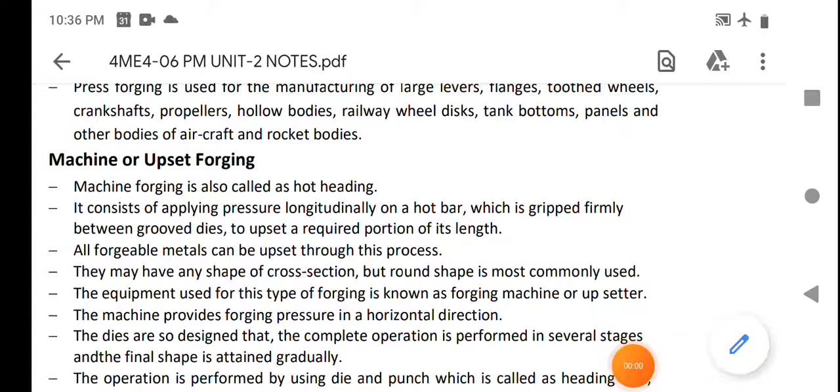Welcome student. Now we start with the topic of machine or upset forging.

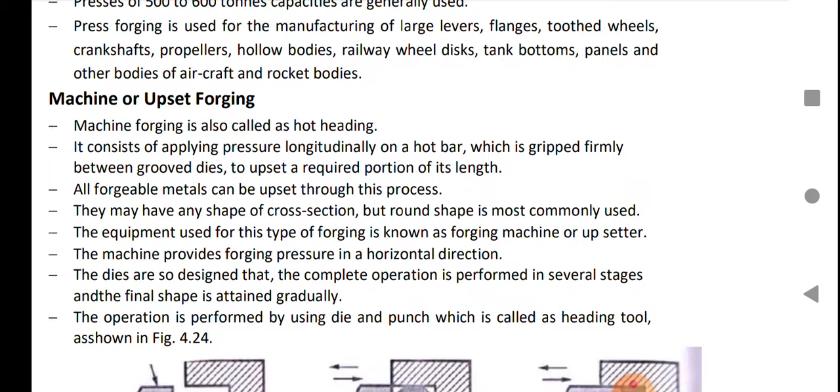Machine forging is also called hot heading operation. It consists of applying pressure longitudinally on a hot bar which is gripped firmly between grooved dies to upset the required portion of its length. Any forgeable metal can be upset through this process. They may have various shapes of cross section, but round shape is most commonly used.

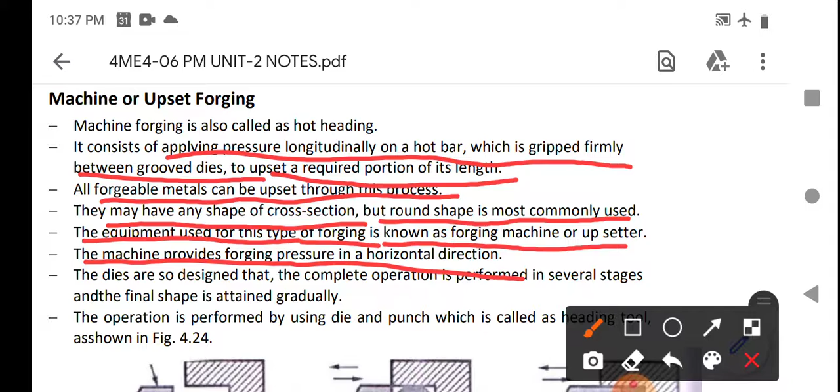The equipment used for this type of forging is known as a forging machine or upsetter. The machine provides forging pressure in the horizontal direction. The dies are so designed that the complete operation is performed in several stages, and the final shape is attained gradually.

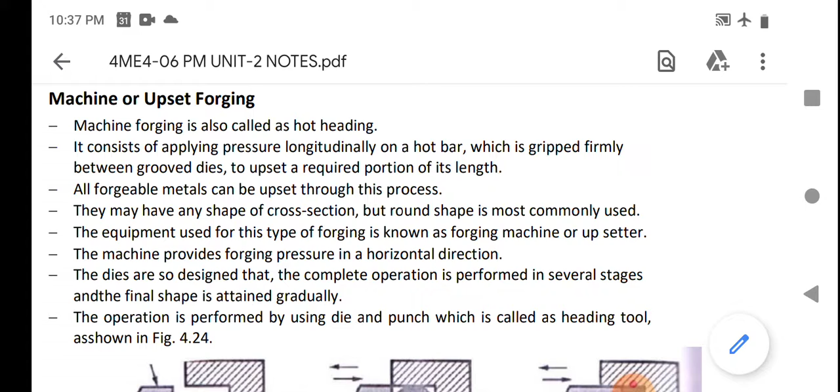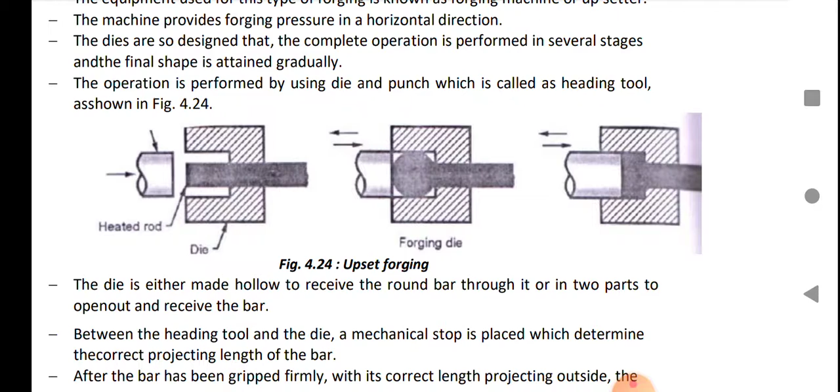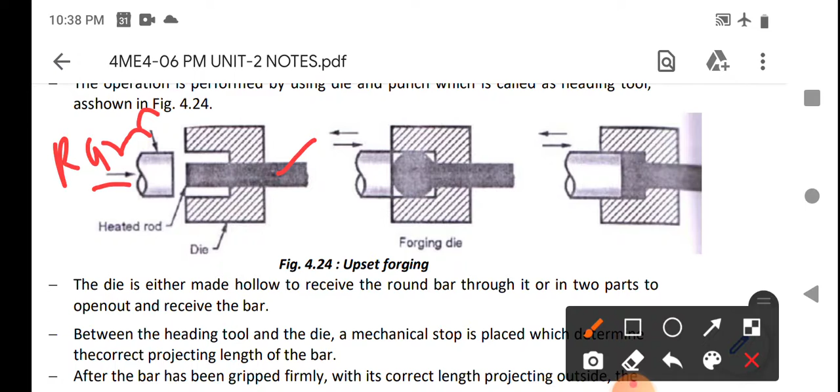The operation is performed using a die and punch, which is called a heading tool. As shown in this figure, when force is applied with the help of a ram on our workpiece, which is shown in black color - this is the workpiece, this is the ram, and this is the container or die. When force is applied, the first deformation is like a spherical shape, then it converts into an increased diameter of the rod. So the main operation of upset forging is to increase the diameter of the rod.

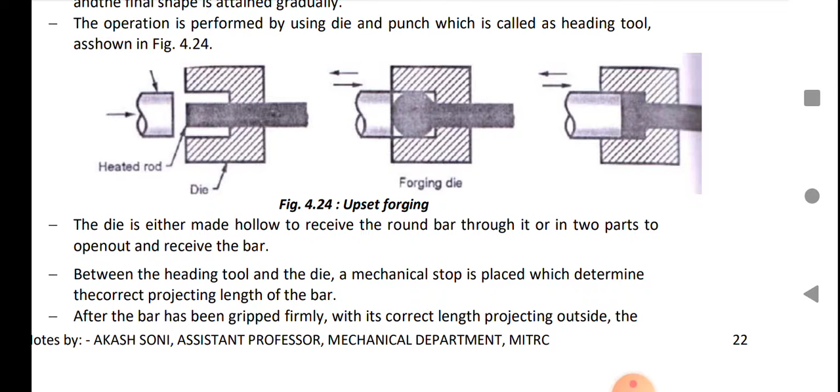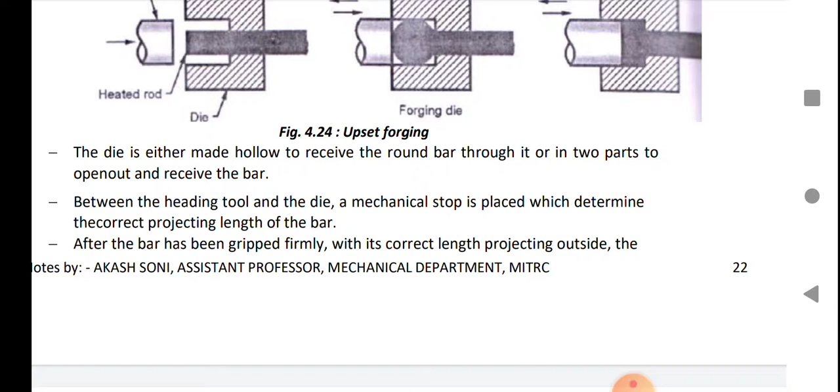Between the heading tool and the die, a mechanical stop is placed which determines the correct projection length of the bar. After the bar has been gripped firmly with its correct length projected outside, many such strokes are required to complete the upsetting. This forging produces rings and rod types with heads and shoulders, such as bolts and nuts.

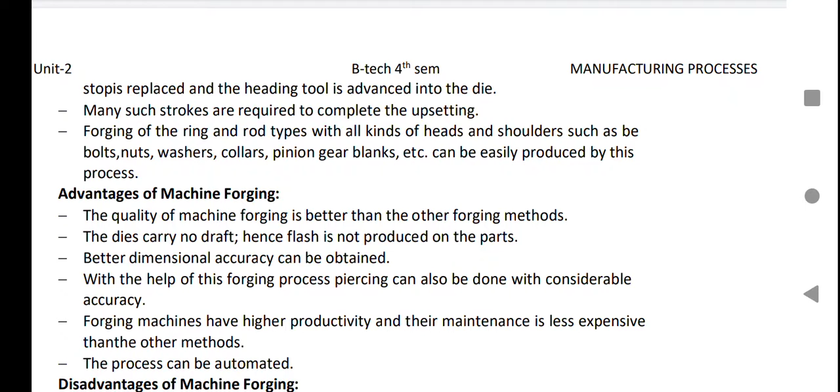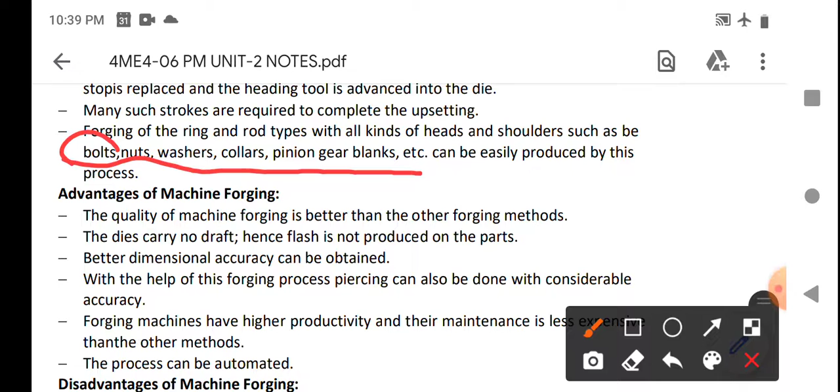This is the most important question which has come in exams: which operation is performed to produce bolt, nut, washer and collar? So upset forging process is used to make bolt and nut type structures. Advantages of machine forging:

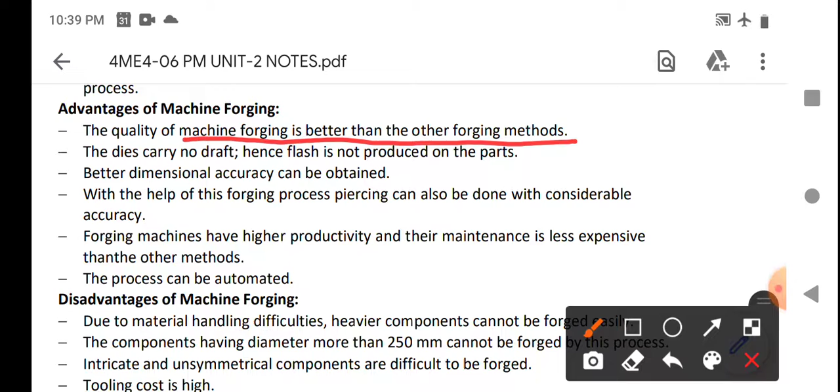The quality of machine forging is better than other forging methods, because the machine applies more force compared to manual forging processes like hammering. In machine forging, we apply more force compared to other processes.

The dies carry no draft, hence flash is not produced on the part in this operation, because it has no draft. Better dimensional accuracy can be obtained with the help of this forging process.

Piercing can also be done with considerable accuracy. Forging machines have higher productivity, and their maintenance is less expensive than other methods. The process can be automated.

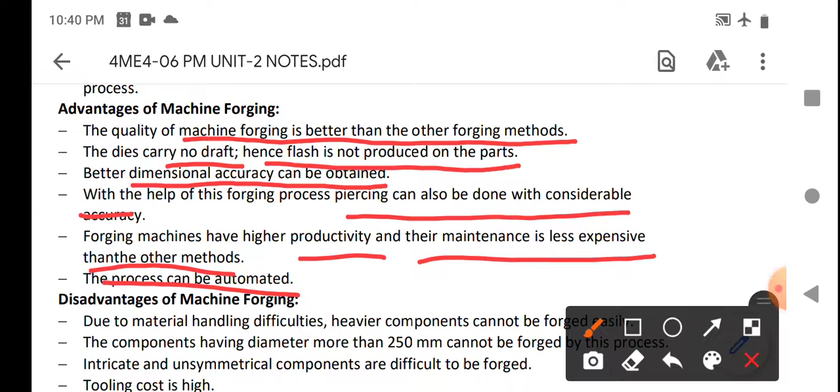Because we use machines, different types of automated machines are now available in the market. When we fix our workpiece on the machine, it automatically performs the operation without any human effort.

Now we discuss disadvantages of machine forging. Due to material handling difficulty, heavier components cannot be forged easily. Components with diameter more than 250 mm cannot be forged by this process.

Intricate or unsymmetrical components are difficult to forge. Tool cost is also high.

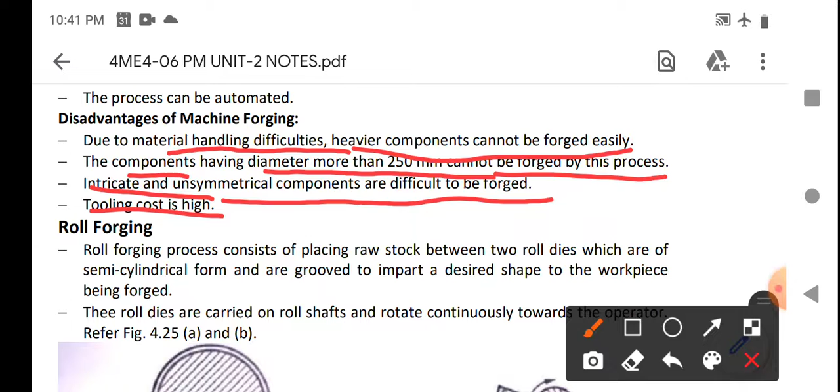Now we discuss roll forging. In roll forging, the process consists of placing raw stock between two roll dies, which are of semi-cylindrical form, grooved to impart a desired shape to the workpiece being forged.

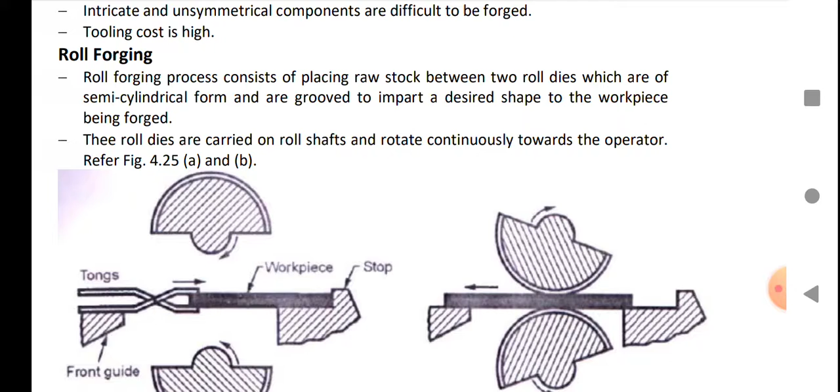As you see in this figure, if we want to increase or decrease the cross section area of the billet or rod, then we use rolling operations.

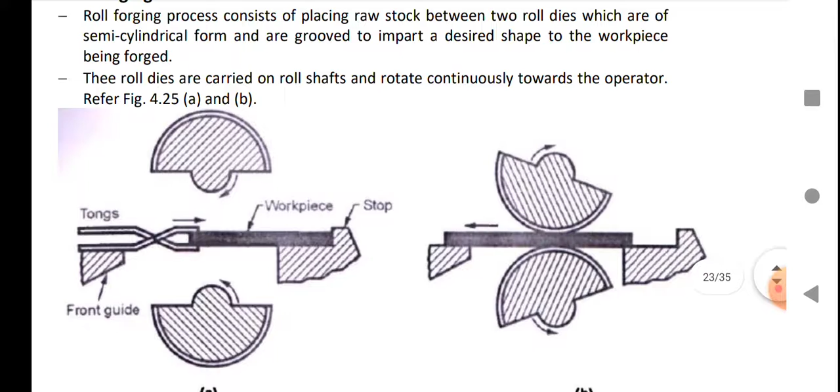As shown in the first figure, the roll is in open condition with the heated workpiece in the tongs, resting on the guide. The rolls are brought together with the stock gripped in the grooves of the roll. The rolling action forces the stock toward the operator.

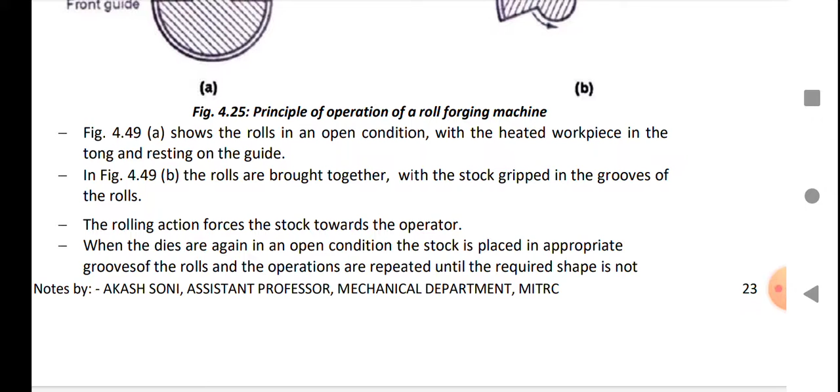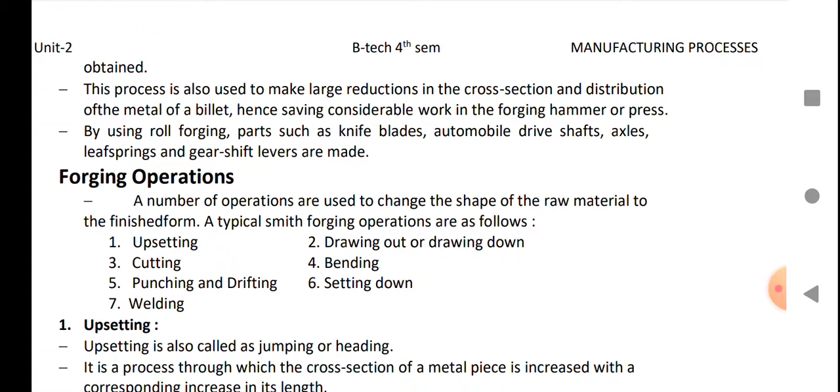When the dies are again in the open condition, the stock is placed in the appropriate groove of the roll and the operations are repeated until the required shape is obtained. This process is also used to make large reductions in the cross section and redistribution of the metal of a billet, saving considerable work in the forging hammer or presses.

By using roll forging, parts such as knife blades, automobile drive shafts, axles, leaf springs and gear shift levers are made. Now we discuss different types of forging operations.

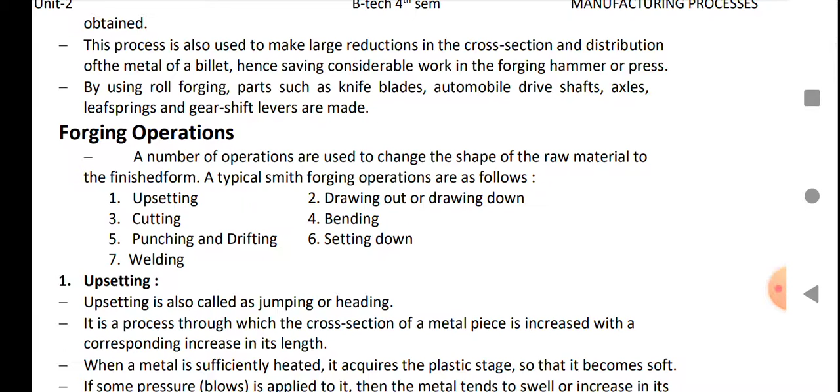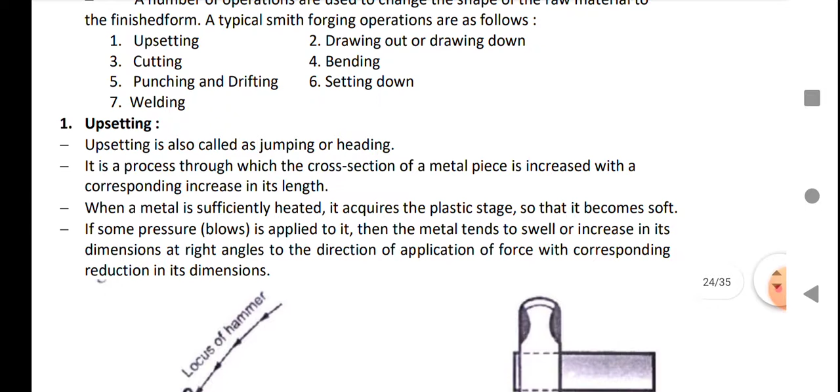As we discuss the upsetting process, in this process we increase the diameter of a rod with the help of the upsetting process.

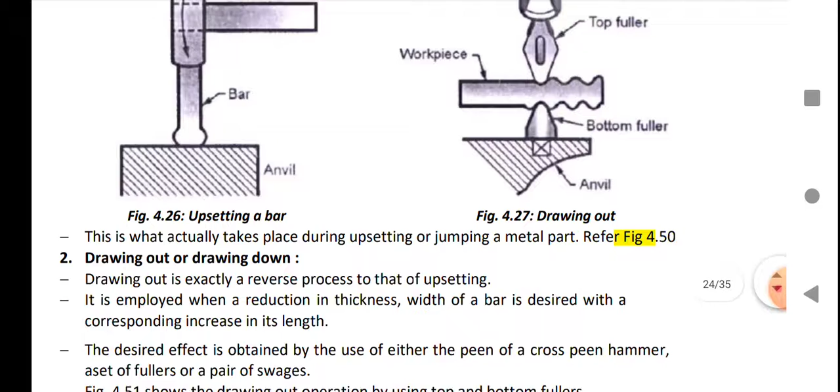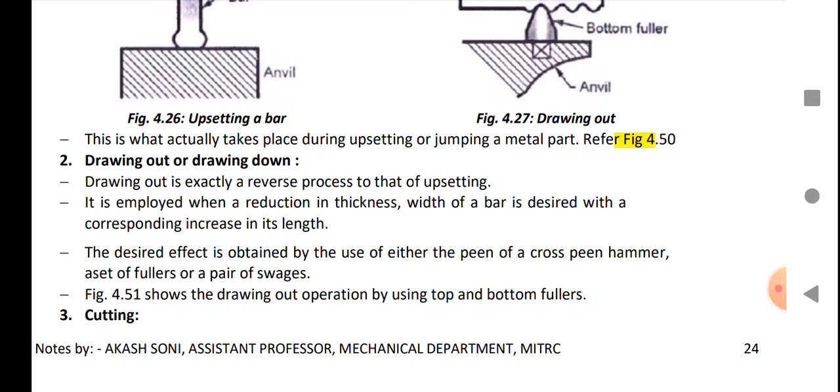Now we discuss the drawing out or drawing down process. Drawing out is exactly a reverse process to that of upsetting. In upsetting, we increase the diameter of a rod, but in drawing out or drawing down operation, we reduce the diameter or cross sectional area of the object, and also increase its length. The desired effect is obtained by the use of either the peen of a cross peen hammer, as seen in this figure.

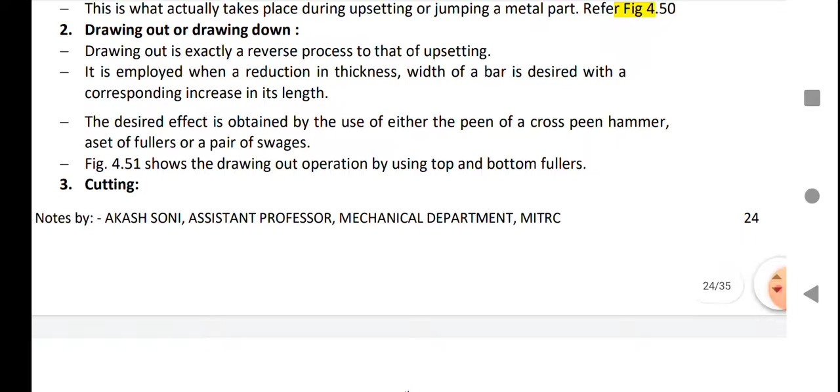Now we talk about the cutting operation. In cutting operation, cutting or chiseling is done whereby a long piece of stock is cut into several specified lengths, or a forging is cut off from the stock.

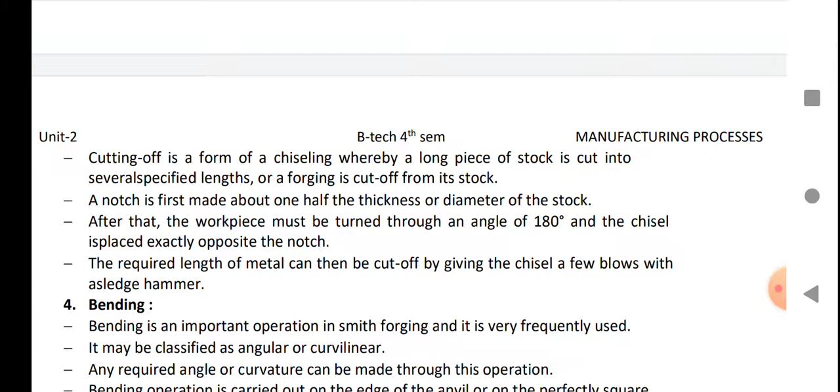A notch is first made about one half of the thickness or diameter of the stock. After that, the workpiece must be turned through an angle of 180 degrees and the chisel is placed exactly opposite to the notch.

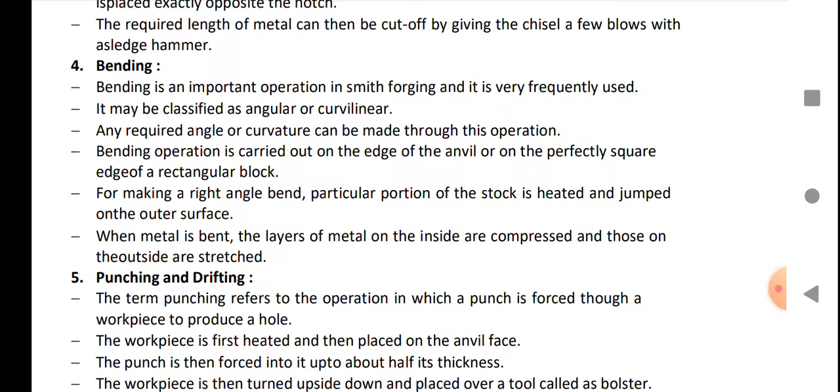Now we discuss bending. Bending operation is to bend the rod or sheet with the help of the edge of an anvil or other perfectly square edge of a rectangular block.

In punching and drifting, punching refers to the operation in which a punch is forced through a workpiece to produce a hole. The workpiece is first heated and then placed on an anvil face. The punch is then forced into it up to about half its thickness.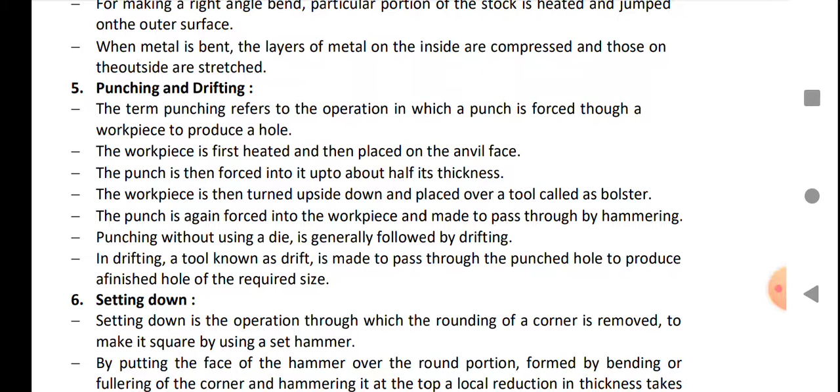The workpiece is then turned upside down and placed over a tool called a bolster. The punch is again forced into the workpiece and made to pass through by hammering. Punching without using a die is generally followed by drifting, in which a tool known as a drift is made to pass through the punched hole to produce a finished hole of the required size.

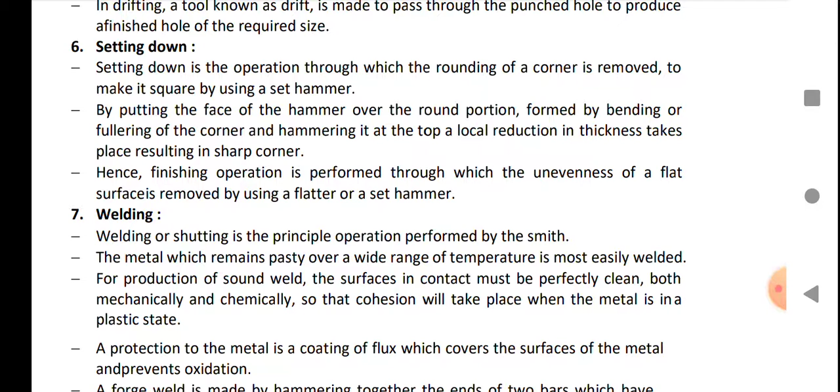Setting down operation. Setting down is the operation through which the rounding of a corner is removed to make it square, using a set hammer, by putting the face of the hammer over the round portion formed by bending or fullering of the corner. Like this type of metal.

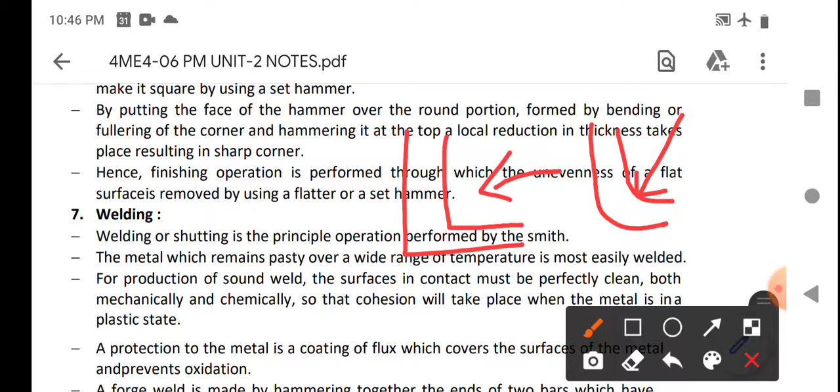We want to produce this, but in the operation of forging, this type of structure is made first. If we want to convert this structure to that structure, we apply a hammering force on that side of the object to achieve this type of product or dimension. This is called the setting down operation.

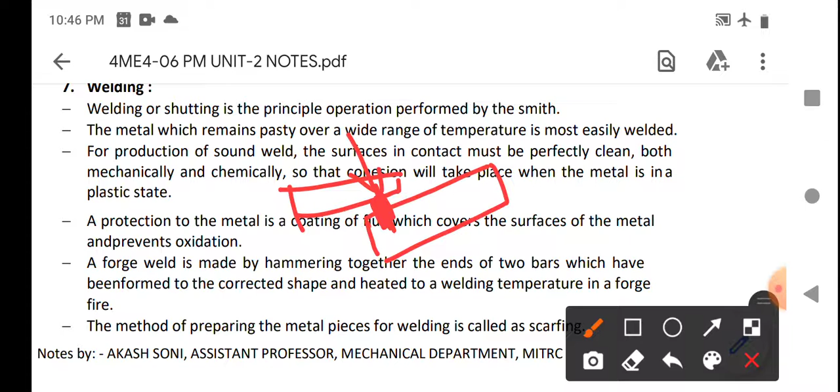Welding or shutting is the principal operation performed by a smith. In this operation, two sheets are placed up and down against each other, and when force is applied by the hammer, they become welded by the hammering forces. This is called welding operation.

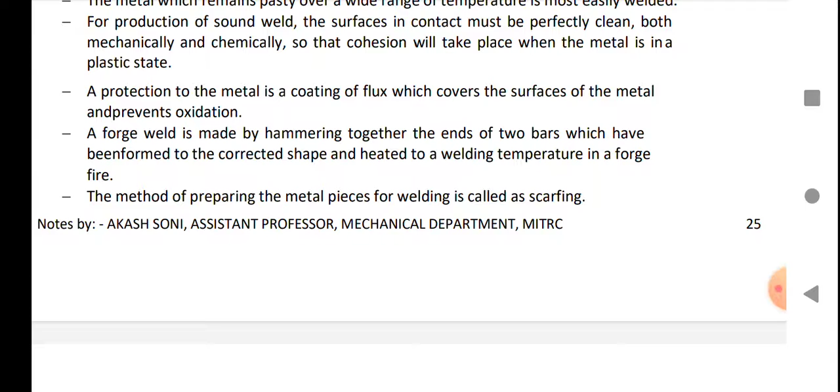The forge weld is made by hammering together the ends of two bars which have been formed to the correct shape and heated to welding temperature in the forge fire. Thank you.